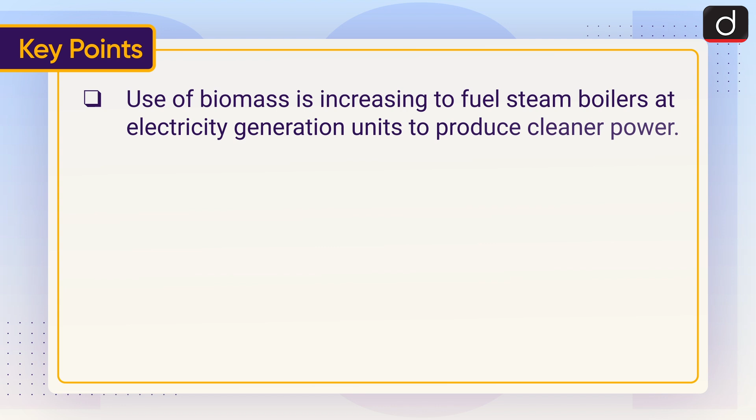Now moving on to the key points. Use of biomass is increasing to fuel steam boilers at electricity generation units to produce cleaner power. But the conventional boilers are designed only for specific types of agro residue such as paddy husk, paddy straw, mustard, among others, to be fired for its lifetime.

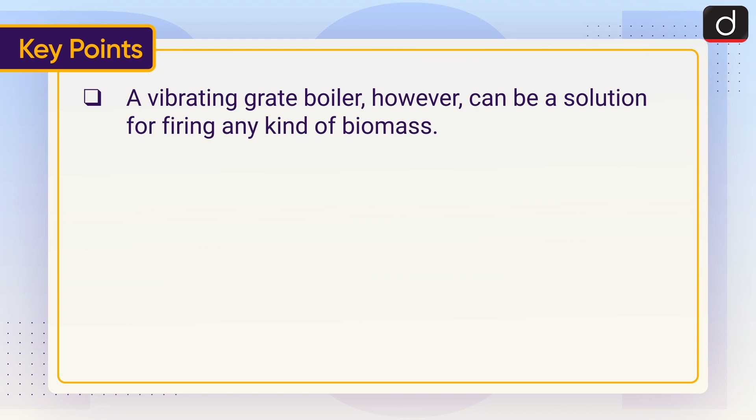A vibrating grate boiler, however, can be a solution for firing any kind of biomass. This biomass-based boiler is as efficient as a coal-based boiler. The efficiency is also achieved up to 85%, equivalent to coal-based thermal power generation.

Now let's discuss what is vibrating grate boiler technology. This new technology developed in Denmark allows the plant to fire a wide range of fuels with less fuel preparation and handling. This boiler had a capacity of 75 tons per hour and generated 15 megawatts of electricity. Vibrating grate accommodates biomass of every density.

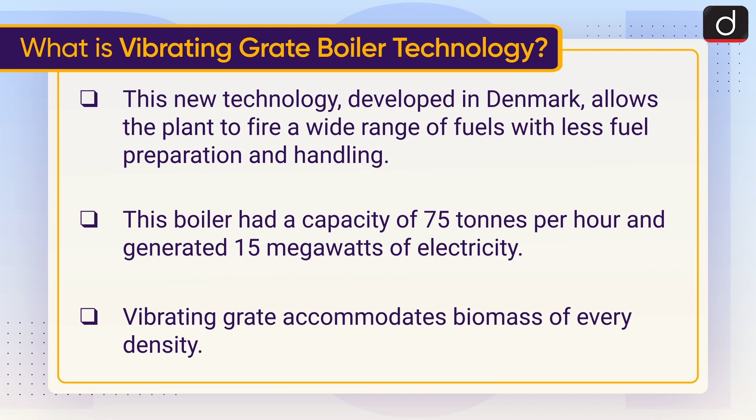Since the vibrating grate supports firing agro residue of any size, it saves energy consumed for processing biomass for energy generation. This system does not require any major structural change to accommodate any kind of agro residue, thus making it a better choice for reducing the burden of stubble.

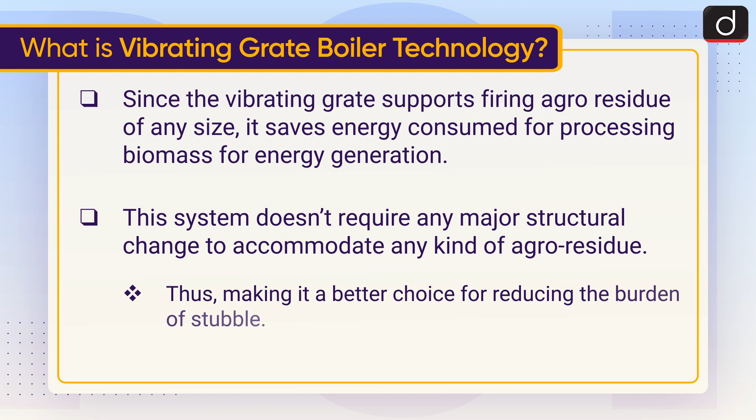The flexibility of using any form of biomass also reduces the cost of transporting the fuel from a longer distance. This in turn saves energy and emissions due to transportation as well.

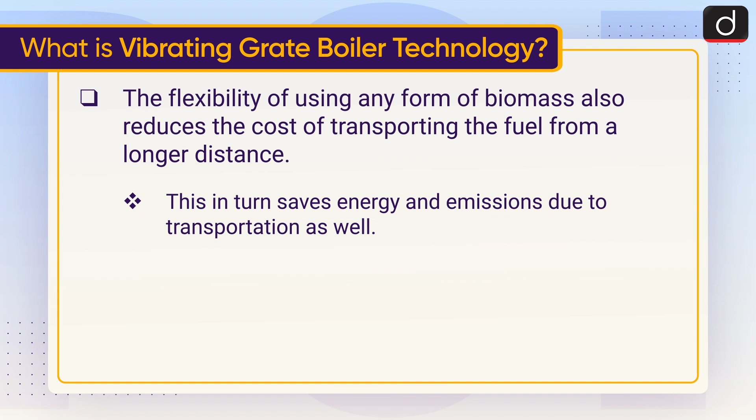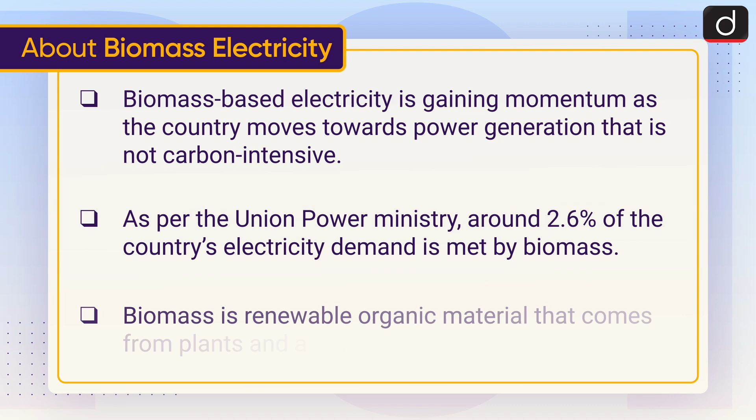Now lastly, let's discuss about biomass electricity. Biomass-based electricity is gaining momentum as the country moves towards power generation that is not carbon intensive. As per the Union Power Ministry, around 2.6% of the country's electricity demand is met by biomass. Biomass is renewable organic material that comes from plants and animals.

Now it's time for the practice question. Consider the following statements with reference to the vibrating grate boiler technology. 1. The vibrating grate supports firing agro residue of any size. 2. This technology has been developed in Denmark. Which of the statements given above is or are correct? 1 only, 2 only, both 1 and 2, or neither 1 nor 2?